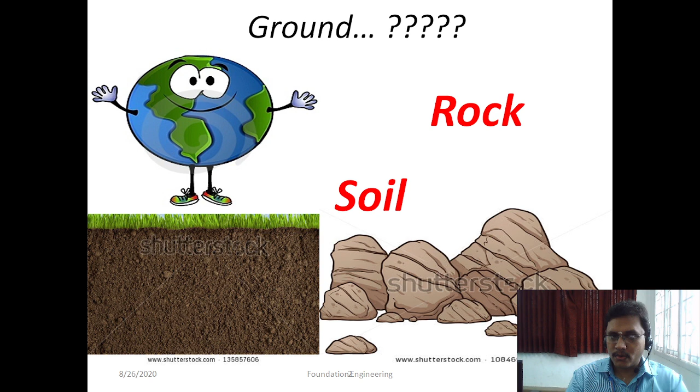For the gemologist, valuable gems are present beneath the ground surface. We need a thorough knowledge of soil; only then can we explore new minerals and the valuable gems present beneath the ground surface.

Then there is the agriculturist. Agricultural people grow crops over the soil. Before that we have to get thorough knowledge of the soil; only then can we go for a particular type of activity.

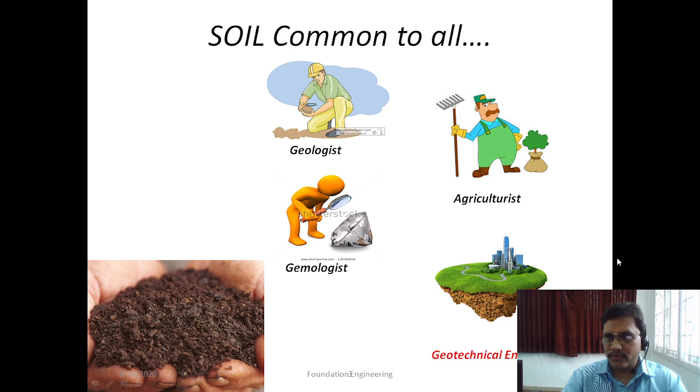Next comes the final picture, geotechnical engineering. What do you mean by geotechnical engineering? It is the engineering that deals with the study of soil mechanics. After studying soil mechanics, we apply it to the design of various foundations. This is the responsibility of geotechnical engineering.

From a small hut to large infrastructure, we place structures over the soil. Before that, we must get thorough engineering knowledge of the soil and rock before placing the foundation. It's a very important thing, and geotechnical engineering is responsible for it. Whether a high-rise or a small hut, it is placed over the available ground surface.

The soil profile is not the same from place to place; it differs. That is the problem here, so we have to get thorough knowledge. For example, at distance x the soil has property y, but if you move a lateral distance of 1 meter or 1 foot, the soil property changes. This is the problem in geotechnical engineering.

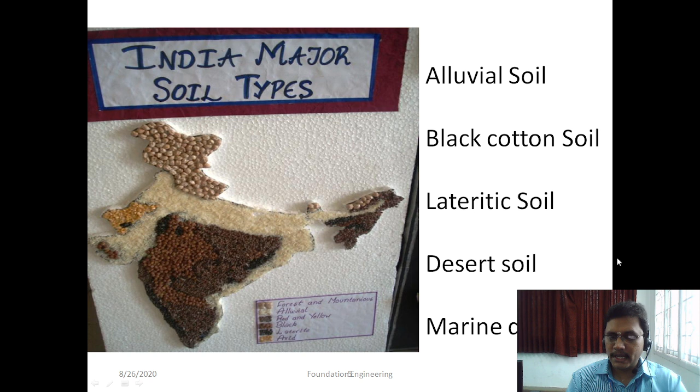This slide shows the major types of soil formation throughout India: alluvial soil, black cotton soil, lateritic soil, desert soil and marine deposits. These are the major soil deposits in India.

So what is bearing capacity? Bearing capacity is defined as the supporting power of soil or rock. Not all soils have the same bearing capacity; good soil possesses very good bearing capacity for the structure.

Provide firm support. In the case of an expansive soil, what happens if you place the foundation? It will settle down. So big structures must be provided with firm support. That is very important, and it depends on the performance of the soil. Third one, shear strength.

Like other materials, soil has another engineering property, the shear strength. It will fail by shear. Soil never fails in tension or compression; it always fails in shear only. Shear is nothing but a slippage of soil particles.

The shear strength characteristics are developed by two parameters. One is cohesion and the other is called the angle of shearing resistance. These two are very important properties that come under shear strength.

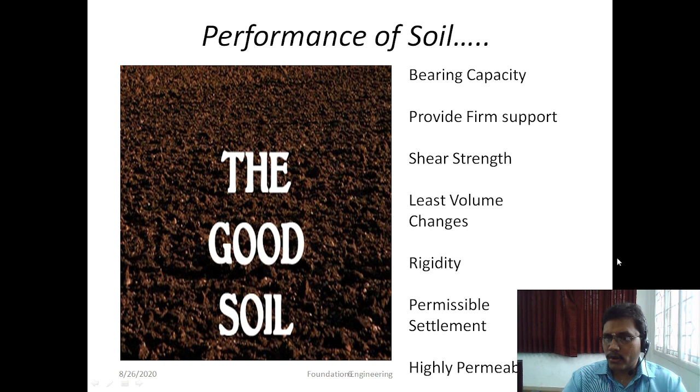Weak soil. What is weak soil? If you load over the soil, structural failure will happen, meaning failure of either the soil or the structure. The concrete structure is going to fail. What happens if the structure immediately fails? It leads to catastrophe, a large disaster.

A catastrophe leads to economic loss and less safety. Once the soil is not strong, these things will happen. So as a design engineer, a geotechnical engineer, or a foundation designer, we should be very careful about that. The soil must be very good.

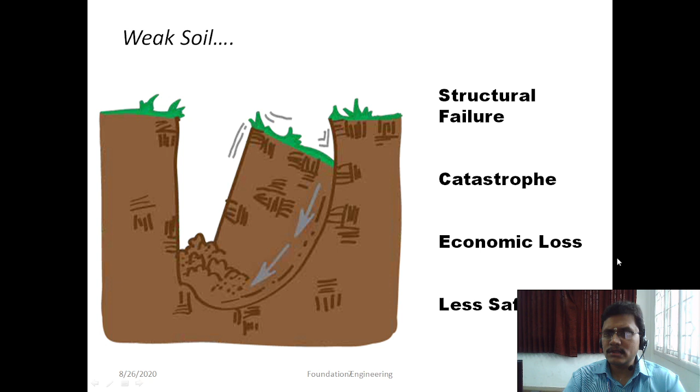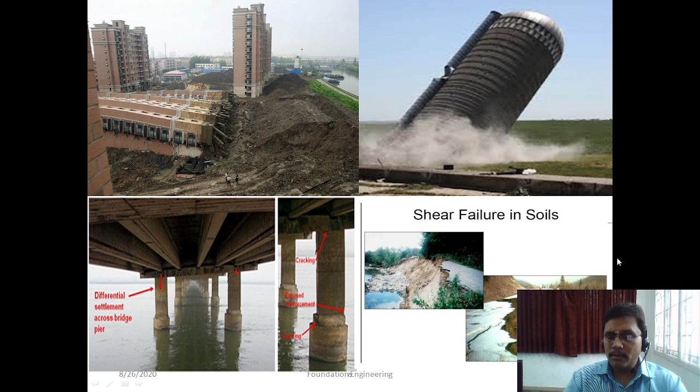If you do not consider these settlement aspects, differential settlement will happen. And shear failure in soil. The last one, if you see the railway track and roads, they will get warping. So this will happen.

Okay, so why mechanics of soil? It's very important. So mechanics of soil is a branch. It deals with solid materials like soil that will also deform under exposure to forces. When the force is applied over the soil, what happens? There will be some changes, some behavior under the application of forces. That branch of study is called mechanics of soil, along with some hydraulic conductivity, because we cannot separate soil and water. The soil and water are always mingled together.

Once the rainfall comes, the water is finally destined into your soil. So we cannot separate the water and soil. We have to study the force deformation or soil deformation under the application of forces, along with some hydraulic conductivity. So that is called the mechanics of soil.

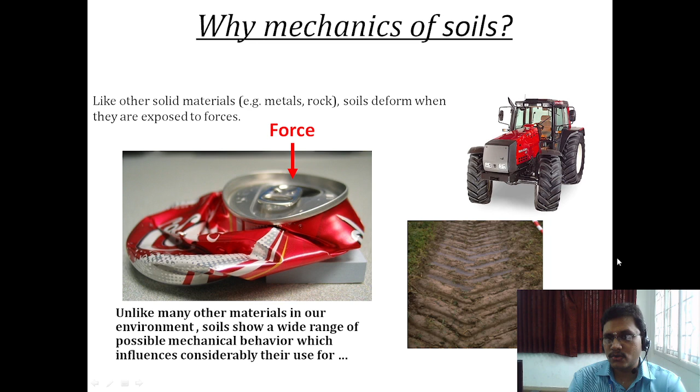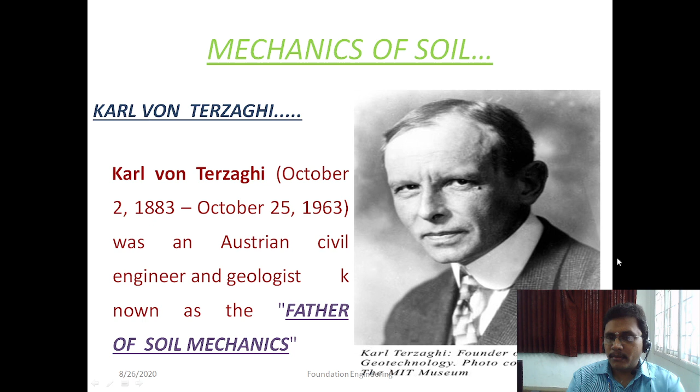So Karl von Terzaghi is the father of soil mechanics. He is the pioneer in the geotechnical field. He is the first person who derived that soil is an engineering material. Before that, we didn't know that soil is an engineering material. Karl von Terzaghi is an Austrian engineer. He first derived that soil is a very good engineering material. So later he was recognized as the father of soil mechanics.

Okay, the field of soil mechanics. What is the application of the field of soil mechanics? It's a tremendous one. Foundation design and construction: once you want to design a foundation and do construction activity, we have to study the mechanics of soil. Pavement design, so road applications. We have different types of road applications, and we have to design the road based on your soil conditions.

Underground structures, obviously underground is nothing but interaction with your soil. Earth retaining walls: a retaining wall is a structure used to retain the earth, and earth is nothing but soil. Design of embankments: embankments play a major role in placing your railway tracks. Highways and railway tracks are all placed on the soil structure.

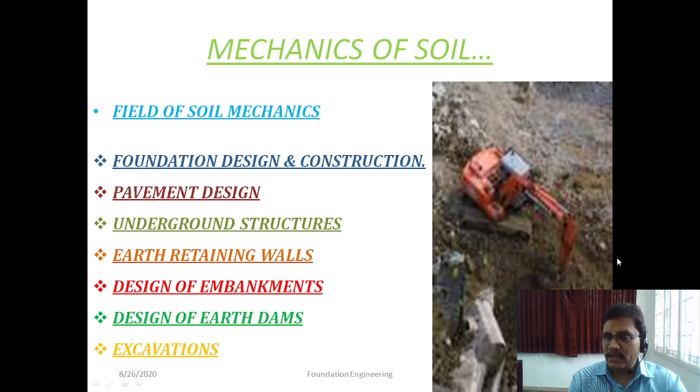Design of earth dams and excavations. Excavation is a very important one. If you excavate the soil without knowing the mechanics or properties of soil, it leads to catastrophe. What happens? The excavated soil slips down and falls on the persons. It leads to a larger catastrophe.

So what is foundation engineering? The application of soil mechanics gives you foundation engineering. The foundation is the bottommost region of any type of structure. It transfers the load from the superstructure to the substructure. That is called foundation. For example, take a tree having a shoot system and root system. The root system takes care of your shoot system. The root is bonded with your soil, and it takes care of your shoot system.

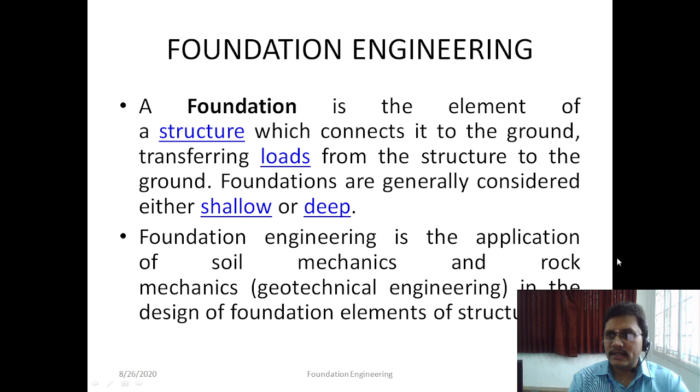Like that, the foundation is the bottommost region of your structure. It takes care of your loads and gives stability to the structure. It is the element of a structure which connects to the ground. The main function of the foundation is to transfer the load from the superstructure to the substructure. In general, foundations can be classified into two types: shallow foundation and deep foundation.

Before that, we will discuss the purpose of foundation: to distribute the weight of the structure, to provide a level surface for construction, and to prevent the lateral movements of the supported structure. Next class we will discuss the classification of foundations.